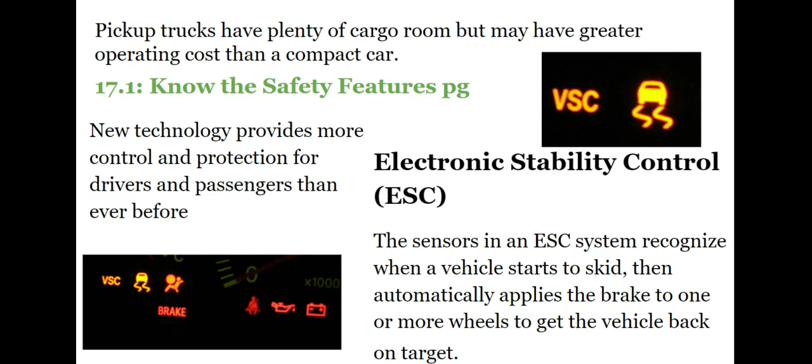One of the most important factors in purchasing a car, when you look through cars online, is safety features—from airbags to electronic stability control that helps you in skidding, to side impact airbags, to tire pressure monitoring systems. All of these things help keep you safe and keep your car in tip-top shape.

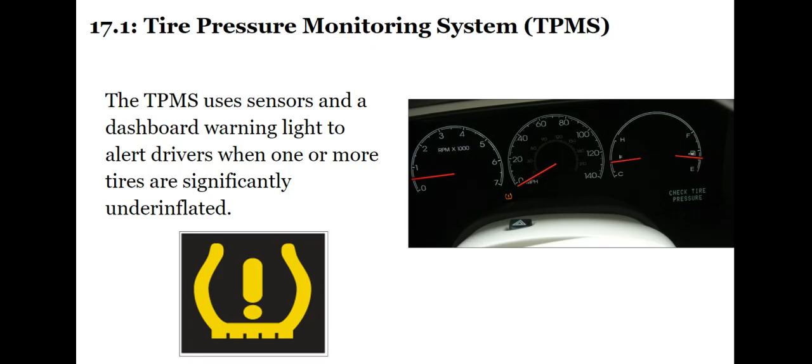Cars today are basically run by a computer, with sensors all through the car that tell it what's happening, whether it's due for a service or needs maintenance on something. The cars are very sophisticated today.

Today, most cars have backup cameras. They're very useful when backing up, as you learned in the behind-the-wheel part, but that should not be your main focus when backing up. You shouldn't stare at the screen—treat it more as a mirror, just one place you can look. When backing up, you should have your head turned around, looking out the back windshield and side windows. That helps guide you.

Remember, the camera has what we call a fisheye lens, or wide angle lens, so it distorts the image behind the car. Things will appear closer than they really are.

Some cars have lane departure warning systems—they'll tell you when your car is coming out of the lane, and the steering wheel will actually shake to tell you to get back into the center of the lane. There's also variable ride height suspension: when you're off road, the car's height goes up, and when you're on the expressway driving fast, the car lowers down tighter to the ground.

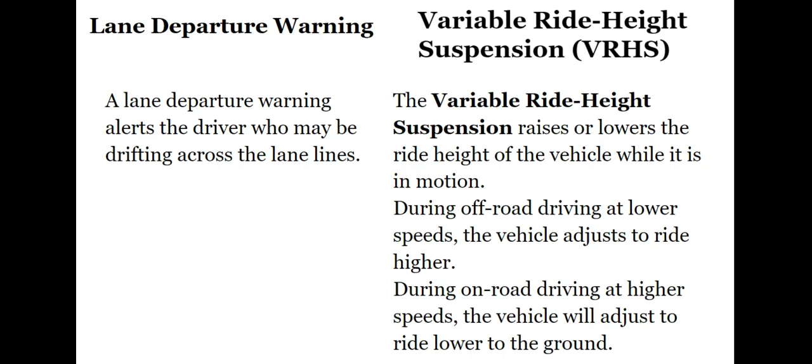Very cool. So what are the advantages of buying a new car over a used car? They both have advantages and disadvantages, but for a new car, it's yours, it's brand new, there's nothing wrong with it, it's all in tip-top shape. Every dent, scratch, or thing you do to it, you will know because you did it.

The nice thing about new cars is they come with warranties, so you don't have to worry about scheduled maintenance. Typically, most cars now come with either a 3-year, 30,000-mile warranty or a 5-year, 50,000-mile warranty—it depends on the manufacturer. Some can be as much as 10 years, and you can always buy more warranty protection if you want.

So that's the advantage of a new car. Then there are some advantages of used cars. Obviously, a new car is going to cost more. With a used car, somebody else already worked off all the depreciation, so the purchase price is lower—just like iPhones.

If you want the newest and latest iPhone, you're going to pay for it, but you could probably get an iPhone 8 for half the price of an iPhone 11 right now. That's just how it works, and a car works the same way.

The nice thing about a used car is it's cheaper to insure, and if it's more than 5 years old, the depreciation slows down very quickly—you only lose a little bit every year. The biggest depreciation loss is in those first 2-3 years. Literally, as soon as you drive a new car off the lot, it depreciates in value—10 seconds after you drive it off, because it's no longer new.

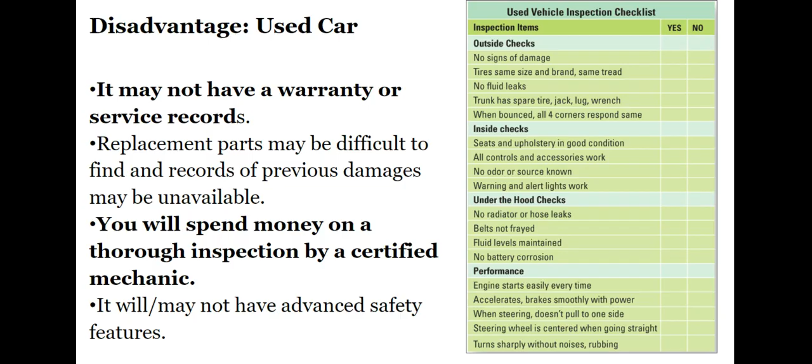Now, the nice thing about CarMax and those type of places is they have a mechanic look at it and then they certify it, which is a nice thing. You'll pay a little bit more for the car than you would on the street, but some people like that peace of mind. So comparison shop, you guys got it really easy now.

You just go on the internet like you all did, and you can compare prices and equipment and features, and you can even shop around online now. You can have these different dealerships bid against each other.

So you go to one and say, you're offering me the car for $30,000, the other one's offering me $29,000, beat that price, and you can go back and forth. A lot of people do this. You'll bounce around once you're set on a car and color and specs you want.

You can have them compete for your business, within reason. Everybody has the point where they're not going to give you a $30,000 car for $20,000, but you could save a couple hundred dollars by comparison shopping.

So let's get into the preventative maintenance. The car has a number of different systems in it to keep it running. Preventative maintenance just means that you have to take it in when there's nothing wrong and have some maintenance done.

The biggest one is an oil change, okay? You have to change your car's oil. Ask your parents, when did you change the oil last? If they have to think about it long and hard, they probably need to change their oil.

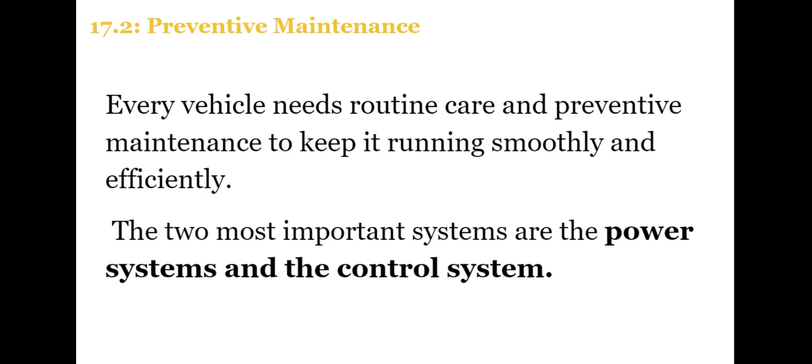But most people that do this regularly, it's one of the single most important things you could do for your car is to change the oil regularly. And you just look in the owner's manual, it'll tell you.

So there's the power system and the control system. The power systems are the car's battery, the engine, and the car's computer.

The book calls them ECMs, that's the electronic control module in the computer. The whole car is controlled by a computer now, so the mechanic can actually hook up a device to your car and read the computer and know all what's going on with your car.

Then there's the fuel and emission systems. Almost all cars now are fuel injected, that means they're not carbureted. If you get a really old car, you'd have to probably go back to the 1980s. They pretty much stopped making carbureted cars in the early 90s.

But basically what this is, fuel injected means the computer puts the precise amount of gasoline into the engine that it needs to run. Whereas a carburetor was a mechanical device that when you stepped on the gas, you would open up a lever that would let the gas in.

And quite often it let too much or too little, and it wasn't very controlled. The fuel injection system is controlled by a computer and very precise, therefore saving you more on gas.

The muffler's underneath the car. This reduces the noise. Without the muffler, your car would sound like a tank going down the street. You could tell a car whose muffler has gone bad because it sounds super loud. That's usually in the middle part underneath the car.

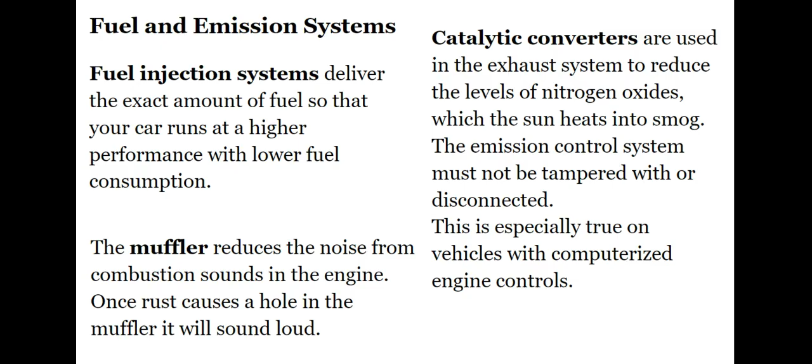So the lubricating system of the car is important. Remember, metal scraping up against metal is really bad, so those parts need to be oiled and greased on a regular basis. If you don't, it causes friction, which causes heat, which causes things to break down.

As I stated early on, the most important one is to change your oil in your car. The oil goes into the engine and lubricates all of the moving parts in there. If you see your oil pressure light come on, you need to pull over and get that fixed immediately. You cannot run your car with the oil pressure light on.

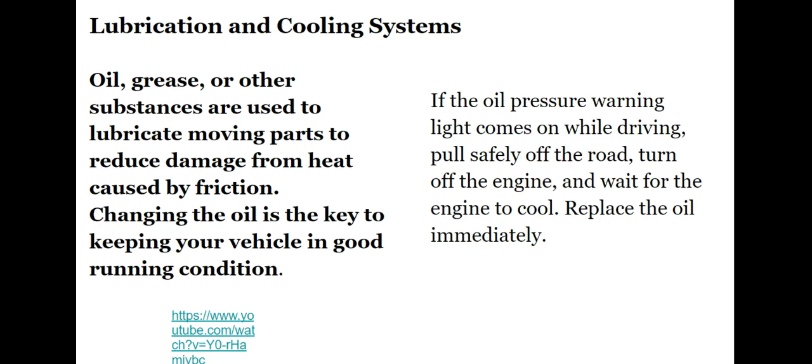Then there's different types of coolant. The biggest one is your coolant in your radiator that circles through the engine and keeps the engine cool while it's running. Typically, antifreeze coolant is greenish in color.

Then there's power steering fluid. This is so that you could turn the steering wheel easily. That's purplish. Then the transmission fluid, which is underneath the transmission, which shifts the gears for you. It's usually a reddish, pinkish color. And then motor oil is black.

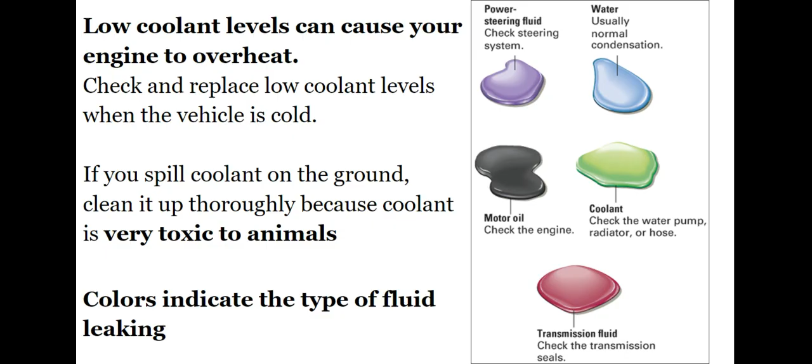Now remember, engine coolant has antifreeze in it, so it's very toxic to humans and animals. So if you're filling up your car in the driveway with some coolant and you spill it, you want to make sure you clean that all up.

So you got to maintain these systems. The steering system, if you see excess play in the steering wheel, like you go turn the steering wheel and the car doesn't turn, it's probably something with the power steering and you need to get that looked at.

The braking system on most cars these days, most new cars have disc brakes on the front and the back. If it's a more economical car, it will have what's called drum brakes on the back, which are older and don't work quite as well as disc brakes. But most cars you'll see have four-wheel disc brakes.

Those need to be replaced. It depends on how hard you drive. If you're driving in the city, lots of stop and go, 3 to 5 years. If it's more rural driving, less braking, you could probably get it for 5 to 6 years. Just depends on how hard you ride those brakes.

The parking brake is a separate mechanical or electrical system, and it works on the rear brake. So you would put the parking brake on, as you know, on hills. Whenever you park on a hill, you want to put the parking brake on so that the car does not roll forward or backwards. It is a completely different system. There's a cable underneath the car. You want to use it quite regularly so that it doesn't suffer from corrosion and get locked.

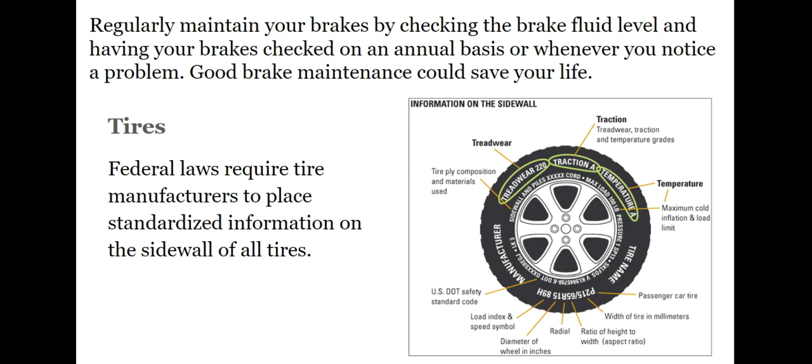But the one thing you need to be able to read on your tire is the sidewall, and the sidewall will tell you what type of tire and size you need. It will also tell you about the tread wear. The higher the tread wear number, the longer the tire is going to last. So the higher the grade, the longer it's going to last.

Traction, the better traction you get is rated. So the highest grade is a AA, and it goes all the way down to C. And then there's temperature ratings too.

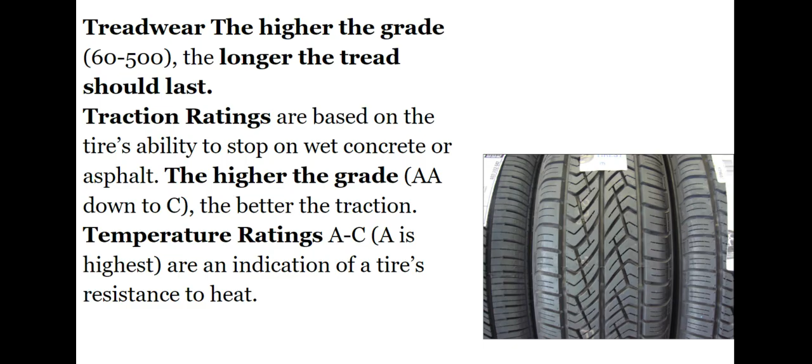Typically up here in the Midwest, we get all season tires on the car. So we want tires that will work just as well in the snow, rain, and sun as do tires down in the South. Down in the South, Texas, Florida, they typically don't sell cars with all-season tires because they're more expensive. Down there, they use summer tires. They are good in water, and they're good on dry pavement, not so good in the snow. You'll slide all over the place in them.

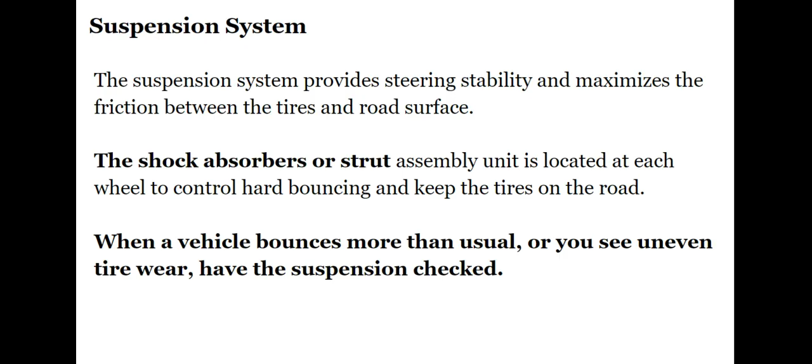The suspension system is what keeps it a smooth ride, and that involves shock absorbers, struts, and springs to keep the car nice and smooth so it doesn't feel like you're in a rocking boat when you're driving. So if you feel your car bouncing around or you feel like you're in the waves in the ocean on a boat, it's time to get your suspension checked, and that could be very costly to fix.

The electricity system includes the car battery. The car battery provides everything with electricity that goes for the radio, the computer, the headlights, the lights inside the car. It's important to check your battery on a yearly basis. Just make sure there's no corrosion.

You can bring your battery to any auto parts store or mechanic, and they'll hook a battery tester to it and tell you exactly how much life you have left. Typically in Chicago, because of the cold, batteries last about 5 years. That's about max on them. A battery will run you $80 to $200, depending on the size of your car - the bigger the car, the bigger the battery.

Now let's say you were going to a concert, and right before you went in, you jumped in the car, checking out your hair or looking for something, and you left the light on in the car. You come back out after the concert, and the car battery is now dead.

What charges the battery in the car is when you drive it. There's something called an alternator, and whenever the car engine is running, it's charging the battery. That's why you never have to plug your car in - notice you have to plug your iPhone in every night, but never your car, because the alternator charges the battery while you're driving. If you leave the radio on all night, the battery will eventually drain and die.

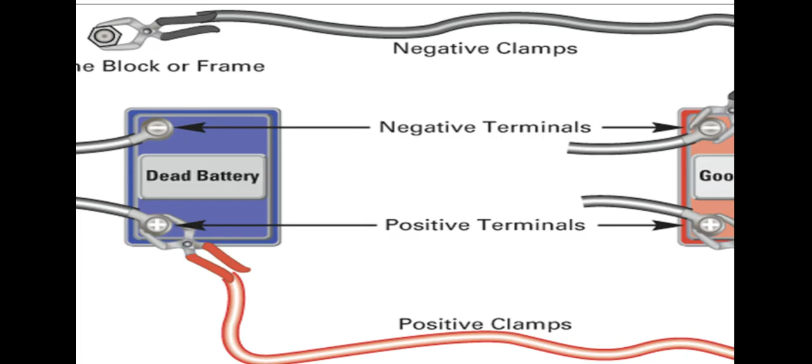That's pretty much it. It's pretty simple, easy to do, and you'll probably have to do it one day. I just had to do it with my daughter not too long ago - our battery died in the Menards parking lot.

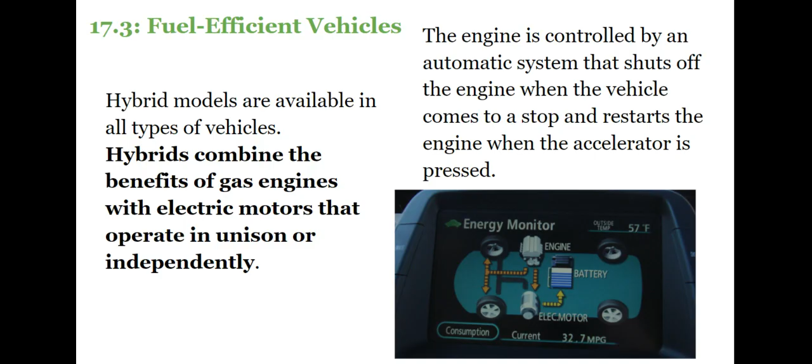The last part here is about fuel efficiency. Today's cars offer great fuel efficiency through fuel injection and the computers in the car, and how they streamline the cars. They now have hybrid cars - you might have one that's electrical and gas, and obviously we have Teslas now that are all electrical. I have a feeling that's where most cars are going to be in the next 10 years, as they come out all electrical.

Control your speed. Cars are set up for their maximum fuel efficiency between 40 and 60 miles an hour. If you get above 60 miles an hour, you're actually going to get 2 to 4 fewer miles per gallon. So you want to stay right in that optimal 40 to 60 miles an hour range - that's where you'll get the best fuel efficiency.

A warmed up engine operates best. If you have a fuel injected car, which most are, you only need to warm the car up for about 30 seconds. A lot of people have the automatic start on their keychain - they start the car and let it run for 10 minutes. That's actually bad for the engine. Fuel injected cars only need to warm up for about 30 seconds or so.